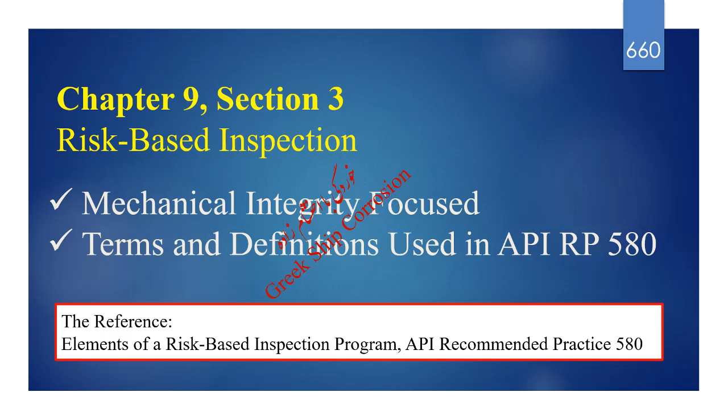Chapter 9, Section 3, Risk-Based Inspection. Mechanical integrity focused. Terms and definitions used in API RP 580. Reference: Elements of a risk-based inspection program, API Recommended Practice 580.

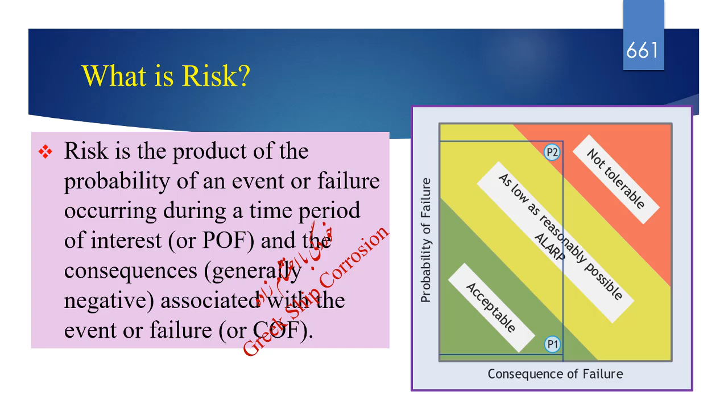What is risk? Risk is the product of the probability of an event or failure occurring during a time period of interest, or POF, and the consequences, generally negative, associated with the event or failure, or COF. Risk equals probability times consequence.

Acceptable region: as low as reasonably possible, ALARP region. Not tolerable region.

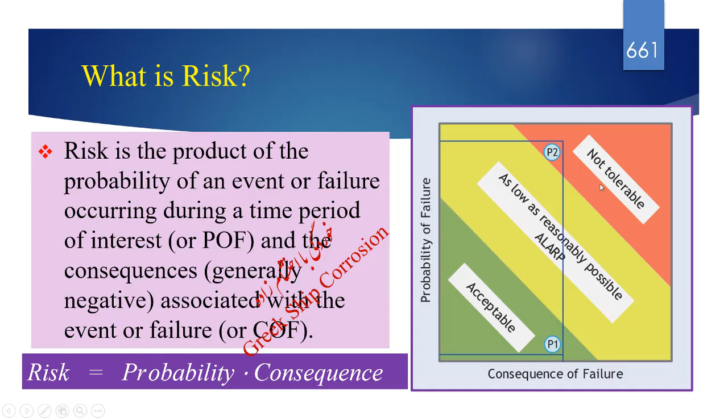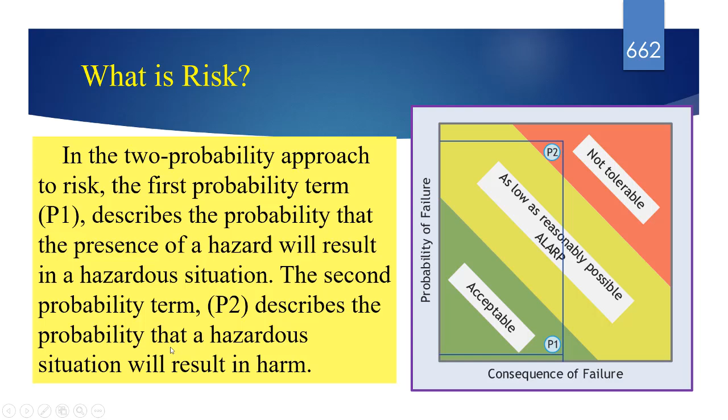In the two-probability approach to risk, the first probability term, P1, describes the probability that the presence of a hazard will result in a hazardous situation. The second probability term, P2, describes the probability that a hazardous situation will result in harm.

Risk plot. The risk plot is shown in this figure. Vertical axis: probability or likelihood of failure. Horizontal axis: consequence of failure. And here is the ISO risk line.

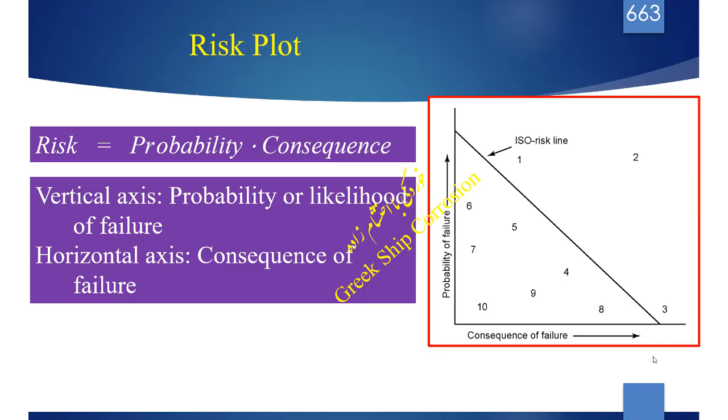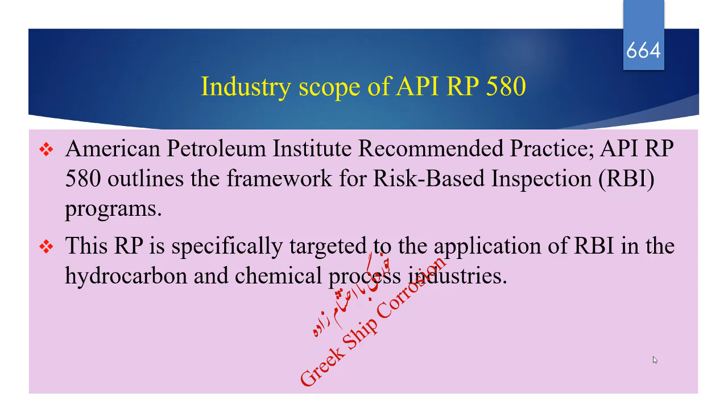Industry scope of API RP 580. American Petroleum Institute Recommended Practice API RP 580 outlines the framework for risk-based inspection, or RBI, programs. This RP is specifically targeted to the application of RBI in the hydrocarbon and chemical process industries. The principles and concepts herein can be applied in other industries with appropriate documentation.

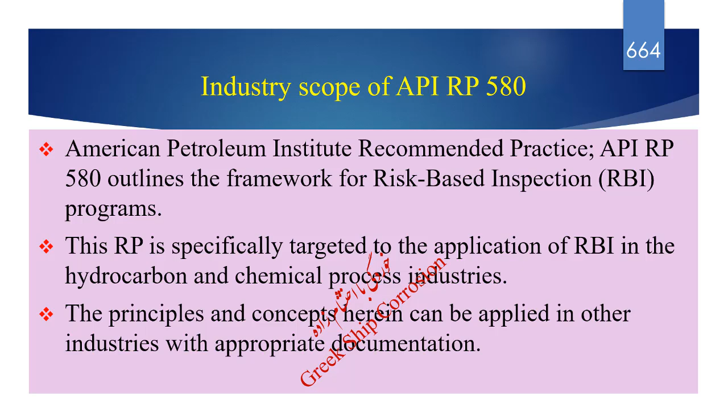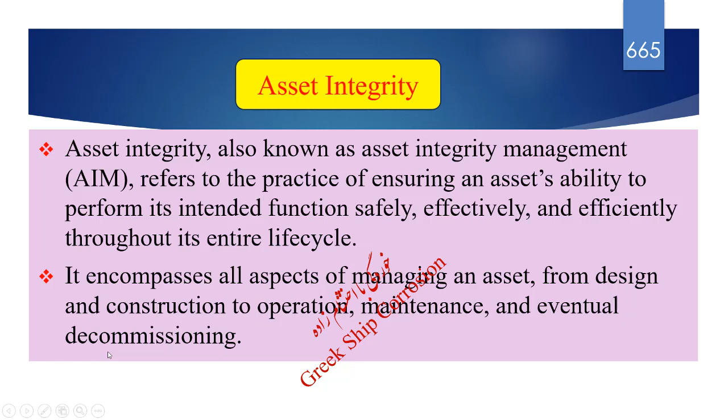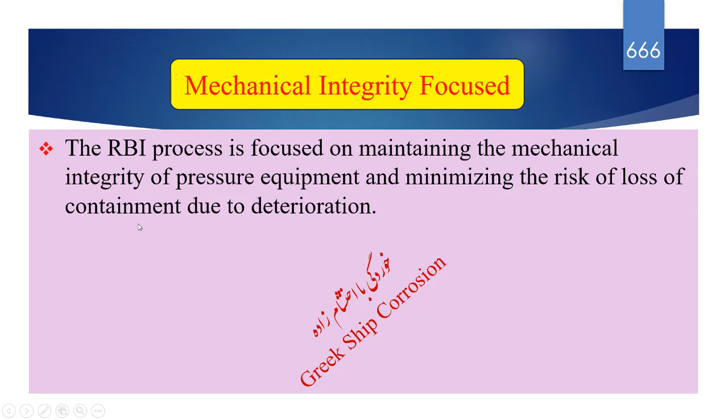Mechanical integrity focused. The RBI process is focused on maintaining the mechanical integrity of pressure equipment and minimizing the risk of loss of containment due to deterioration.

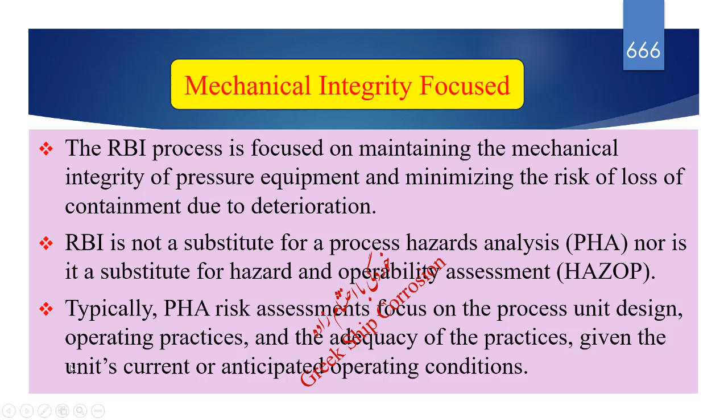RBI is not a substitute for a process hazards analysis, PHA, nor is it a substitute for hazard and operability assessment, HAZOP. Typically, PHA risk assessments focus on the process unit design, operating practices, and the adequacy of the practices, given the unit's current or anticipated operating conditions.

RBI complements the PHA by focusing on mechanical integrity-related damage mechanisms and managing risk through inspection and complementary mitigation and/or monitoring programs. There are other relevant relationships between RBI and other equipment reliability or risk assessment programs in the industry.

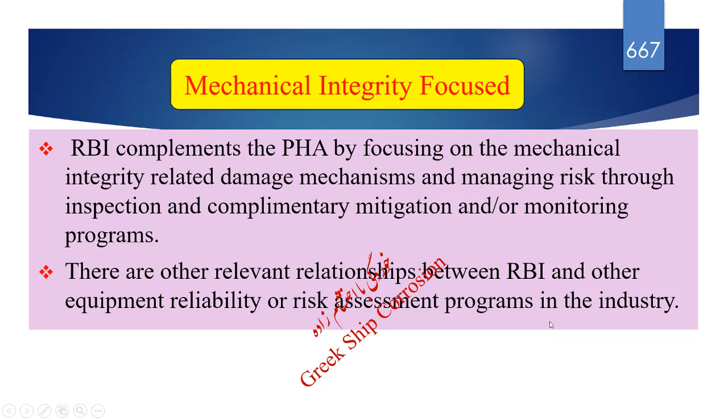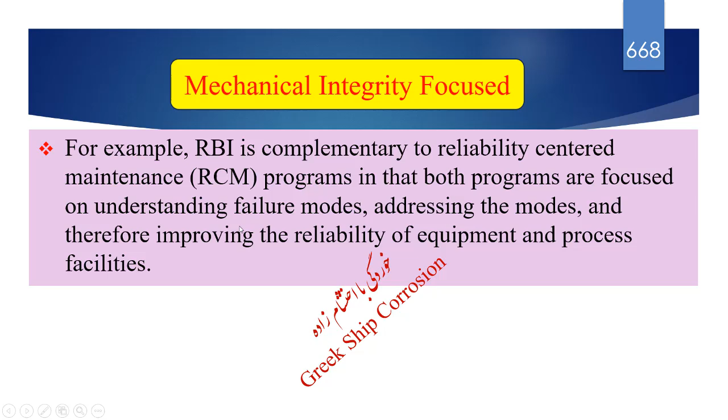For example, RBI is complementary to reliability-centered maintenance (RCM) programs in that both programs are focused on understanding failure modes, addressing the modes, and therefore improving the reliability of equipment and process facilities.

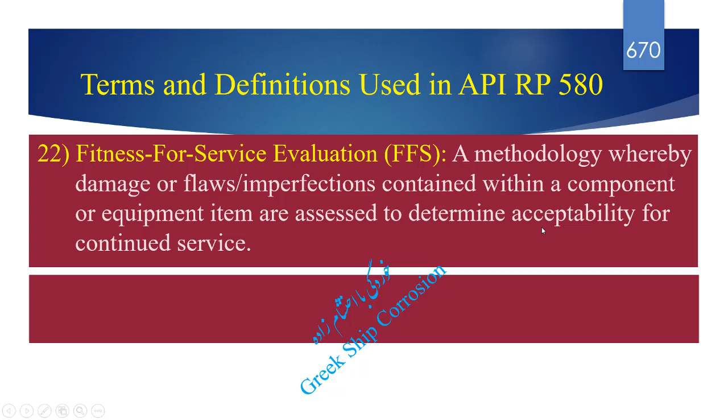22. Fitness for Service Evaluation, FFS: a methodology whereby damage or flaws, imperfections contained within a component or equipment item, are assessed to determine acceptability for continued service.

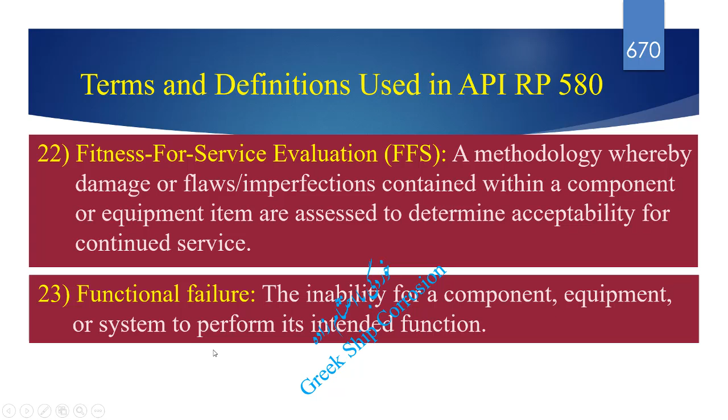23. Functional failure: the inability for a component, equipment, or system to perform its intended function.

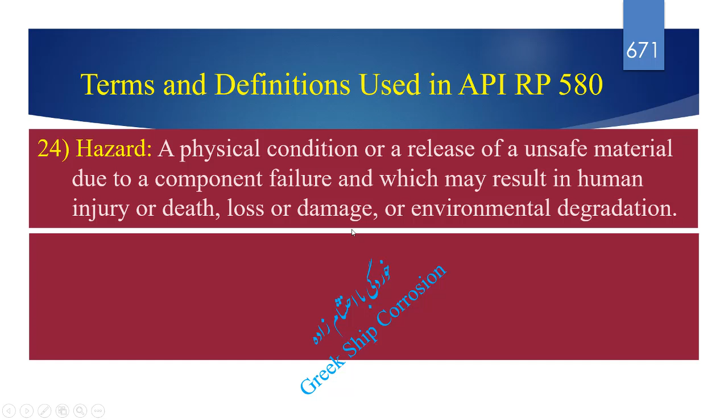24. Hazard: a physical condition or a release of an unsafe material due to a component failure, which may result in human injury or death, loss or damage, or environmental degradation.

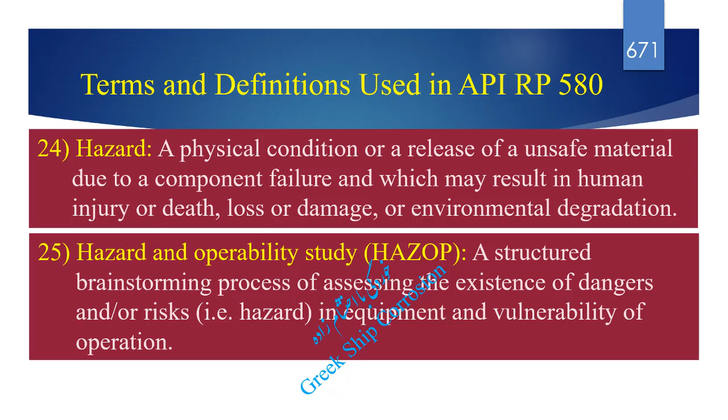25. Hazard and Operability Study, HAZOP: a structured brainstorming process of assessing the existence of dangers and/or risks, that is, hazard, in equipment and vulnerability of operation.

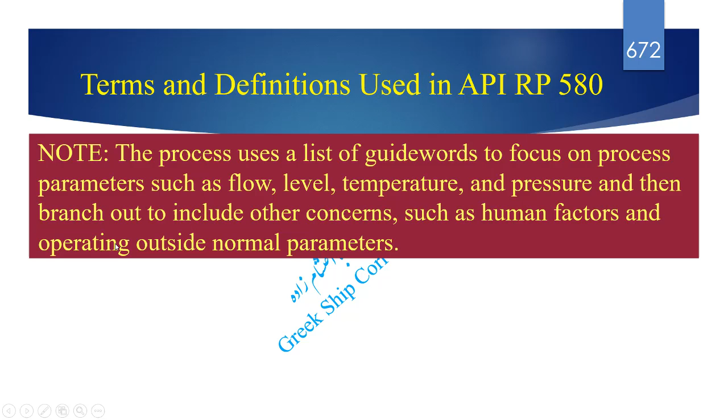Note: the process uses a list of guide words to focus on process parameters such as flow, level, temperature, and pressure, and then branches out to include other concerns such as human factors and operating outside normal parameters.

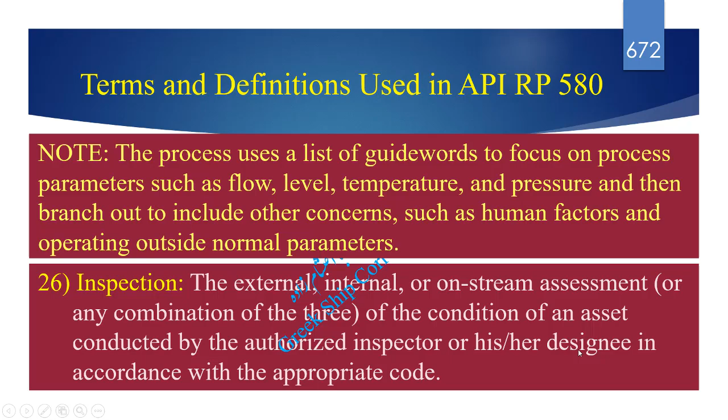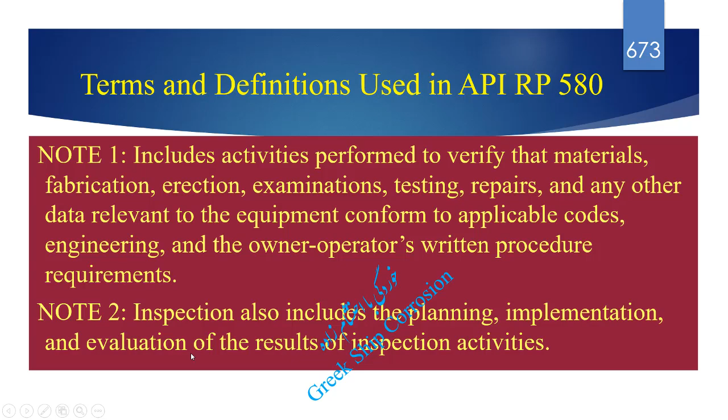26. Inspection. The external, internal, or on-stream assessment, or any combination of the three, of the condition of an asset, conducted by the authorized inspector or his/her designee in accordance with the appropriate code. Note 1: Includes activities performed to verify that materials, fabrication, erection, examinations, testing, repairs, and any other data relevant to the equipment conform to applicable codes, engineering, and the owner-operator's written procedure requirements. Note 2: Inspection also includes the planning, implementation, and evaluation of the results of inspection activities.

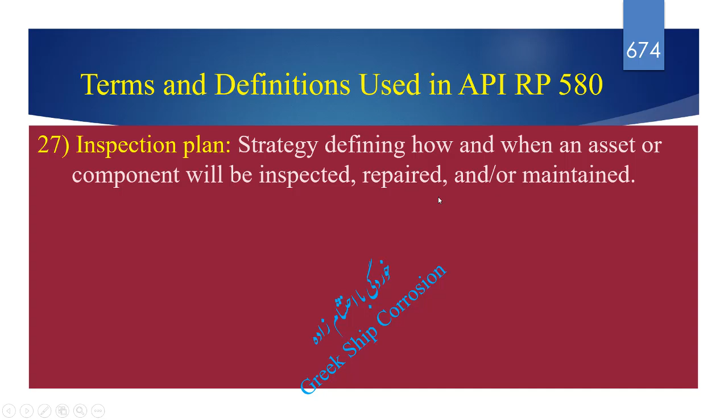27. Inspection plan. Strategy defining how and when an asset or component will be inspected, repaired, and/or maintained. Note: for the purposes of this document, the inspection plan is the product of an RBI analysis that details the scope, extent, locations, methods, and timing of specific inspection monitoring activities for determining the condition of a specific piece of equipment. It is the essential part of a risk-based management plan.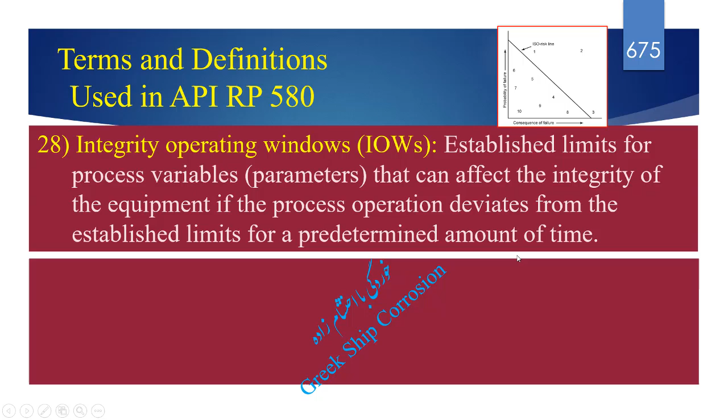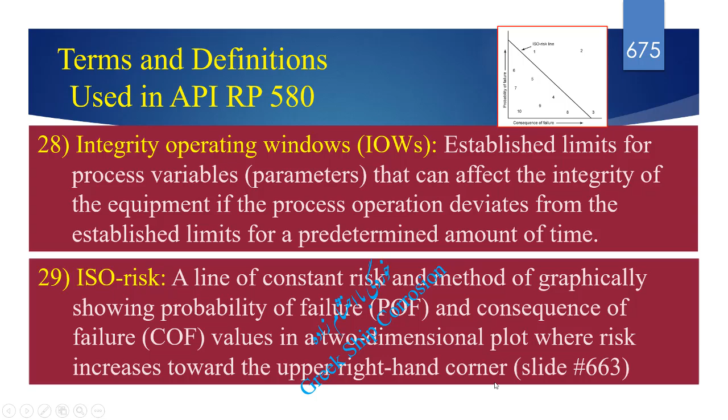29. ISO risk, a line of constant risk and method of graphically showing probability of failure (POF) and consequence of failure (COF) values in a two-dimensional plot where risk increases toward the upper right-hand corner. Slide number 663. Risk increases toward the upper right-hand corner.

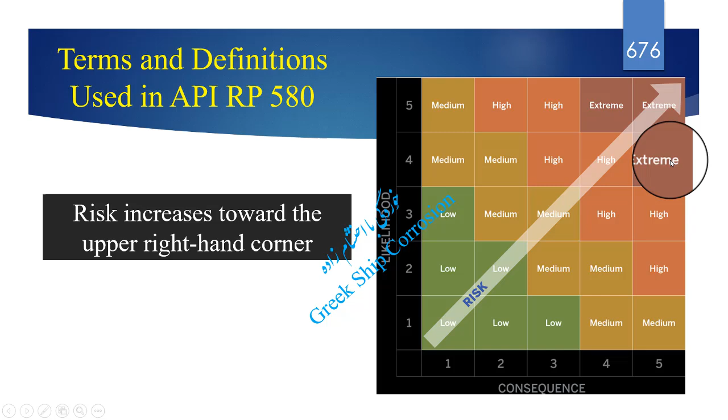Risk is low, medium, high, extreme. 30. Logic model, a tool used to depict the effectiveness in depicting a combination of events that could result in a loss of containment event.

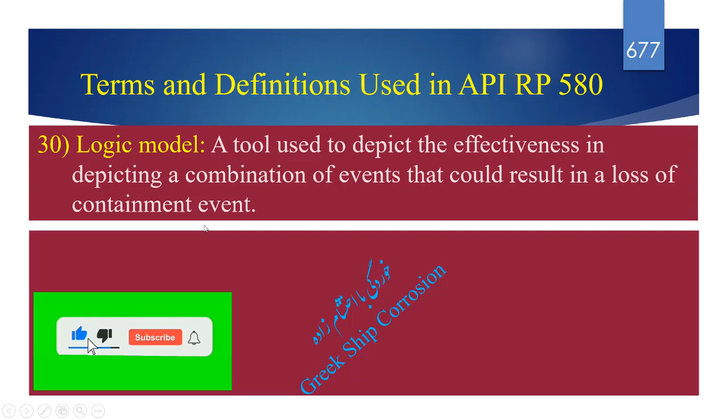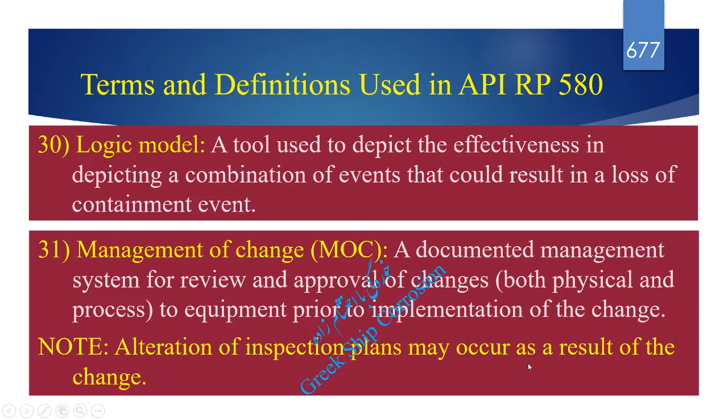31. Management of change, MOC. A documented management system for review and approval of changes, both physical and process, to equipment prior to implementation of the change. Note: alteration of inspection plans may occur as a result of the change.

32. Management system. The framework of work processes and procedures used to provide assurance that an organization can fulfill all tasks required to achieve its objectives.

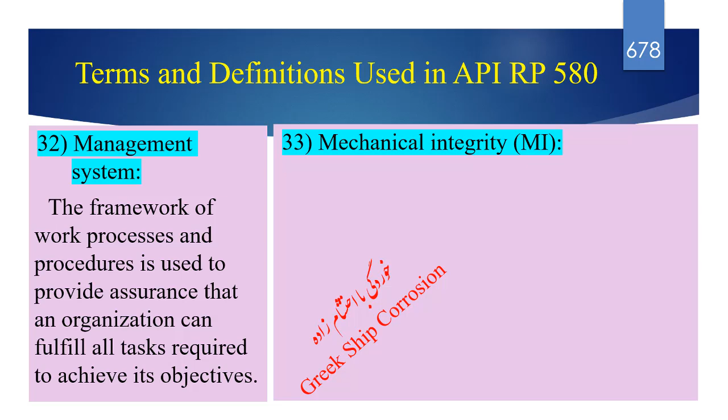33. Mechanical integrity, MI. The management system's work practices, methods, and procedures established to protect and preserve the integrity of operating equipment, that is, avoid loss of containment due to the effect of equipment damage mechanisms. Note: MI is one part of a process safety program.

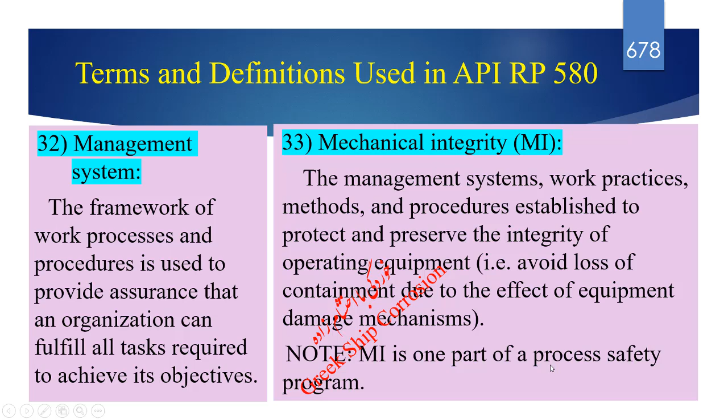34. Mitigation. Limitation of any negative consequence or reduction in probability of a particular event.

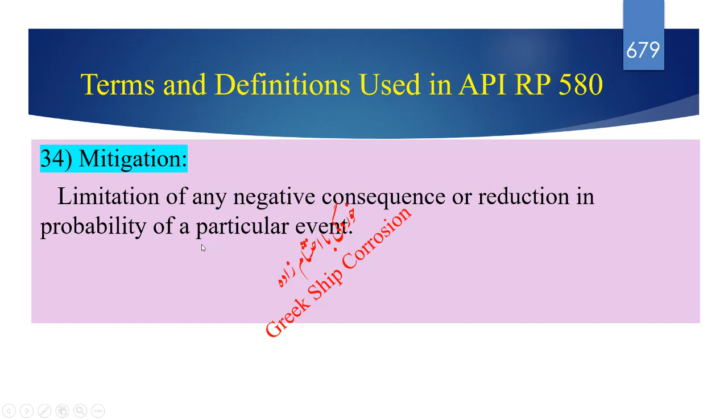35. Physical model. A tool used to depict the progression of events and the release of a hazardous material to the environment.

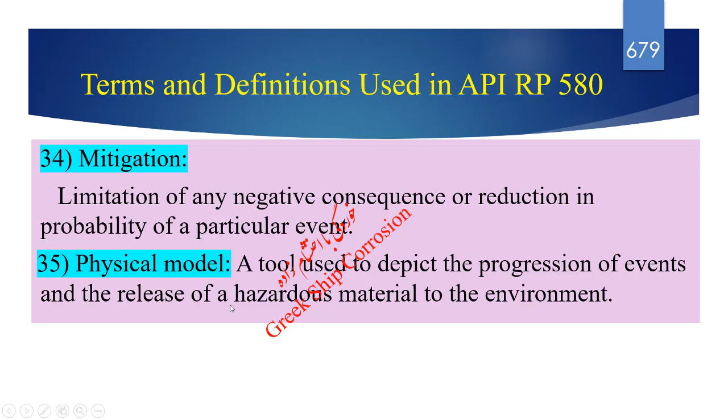36. Probabilistic. Systematic and comprehensive methodology to evaluate risks associated with a complex engineered entity which is based on or adapted to a theory of probability, subject to or involving chance variation.

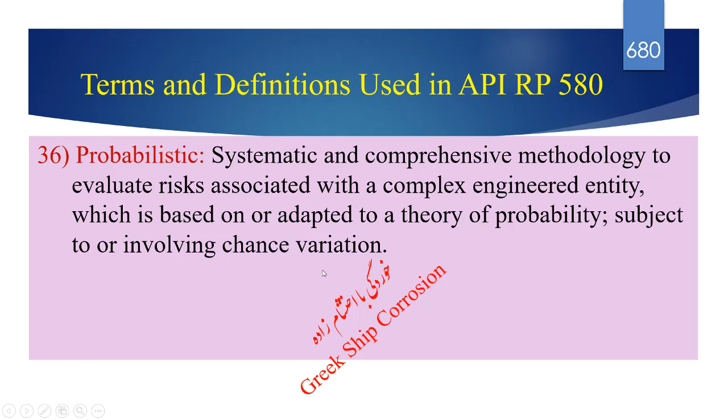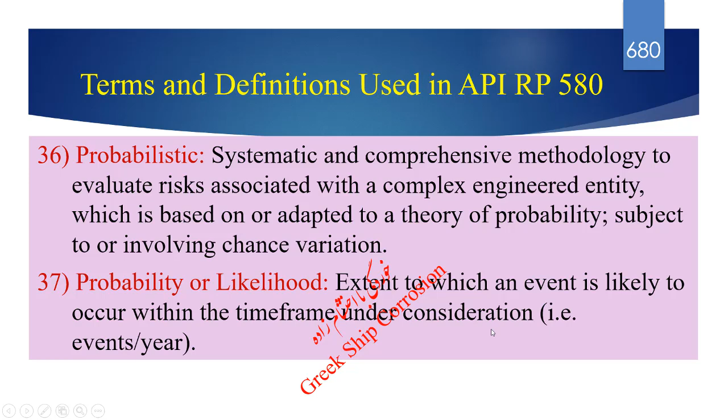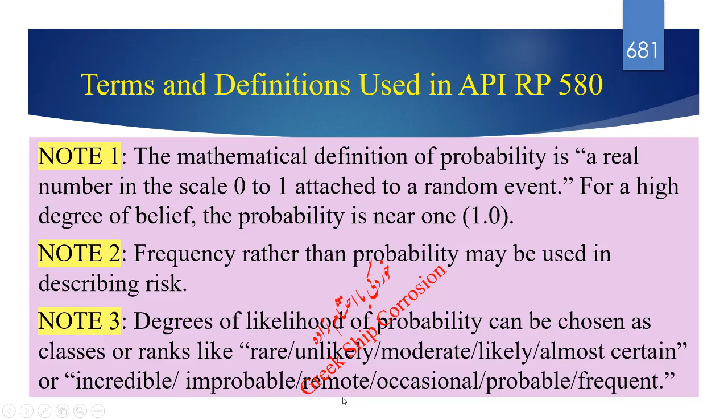37. Probability or likelihood. Extent to which an event is likely to occur within the time frame under consideration, that is, events per year. Note 1: The mathematical definition of a probability is a real number in the scale 0 to 1 attached to a random event. For a high degree of belief, the probability is near 1. Note 2: Frequency rather than probability may be used in describing risk. Note 3: Degrees of likelihood of probability can be chosen as classes or ranks like rare, unlikely, moderate, likely, almost certain, or incredible, improbable, remote, occasional, probable, frequent.

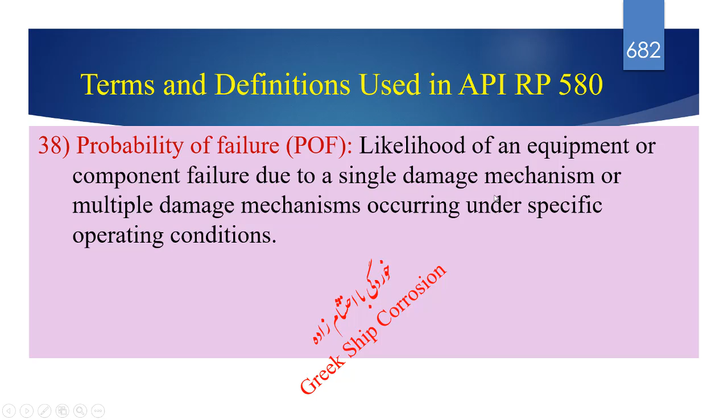38. Probability of failure or POF. Likelihood of an equipment or component failure due to a single damage mechanism or multiple damage mechanisms occurring under specific operating conditions. 39. Process monitoring.

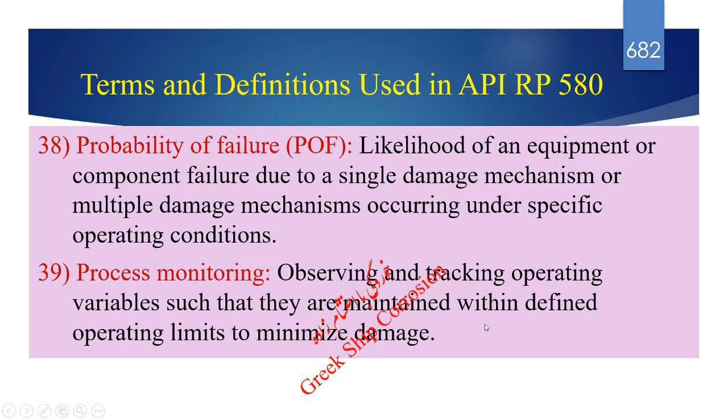Observing and tracking operating variables such that they are maintained within defined operating limits to minimize damage.

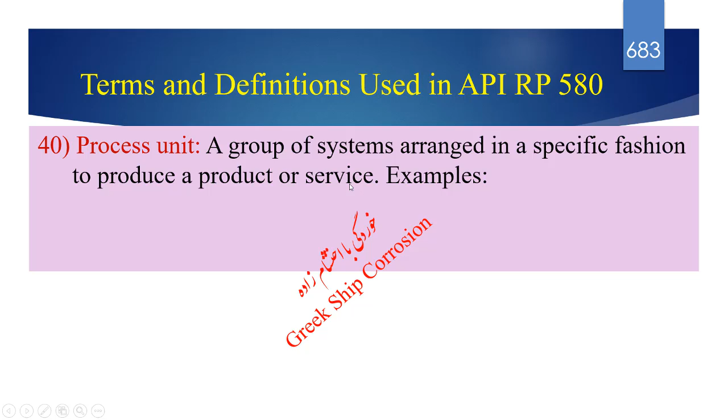40. Process unit. A group of systems arranged in a specific fashion to produce a product or service. Examples: power generation, acid production, fuel oil production, and ethylene production.